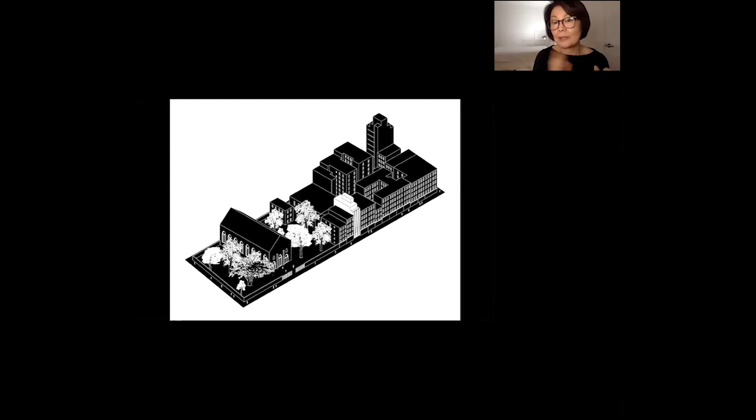This actually comes from observation in terms of your habit. In a way, I wanted to propose a facade that you can actually view up and down the street from side, so that this particular perception of how the building looks might actually generate interest. So it's not flat.

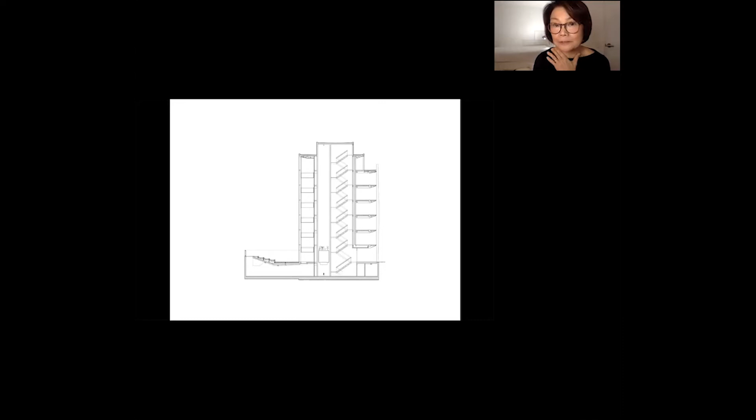So we came up with the idea of a twisted masonry facade, because this neighborhood had to be masonry, but the footprint of these buildings are very, very small, about 1,000 square foot footprint. And then it has a courtyard in the back. This is actually for retail, commercial purpose and offices. It's 7 stories, a ground up building like this.

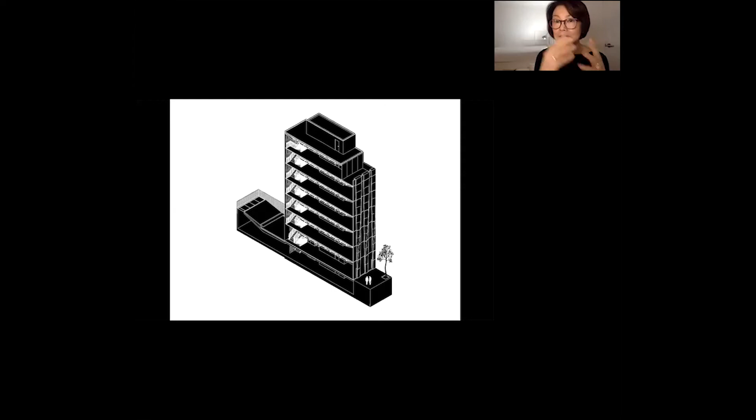In order for us to really do it, we had to do it nearly as of right, and we only had a space about 18 inches to have this twisting of the stonework out. We had to be very carefully calibrated as to how the perception of walking up and down the street as a casual way of life, and then how to actually craft this.

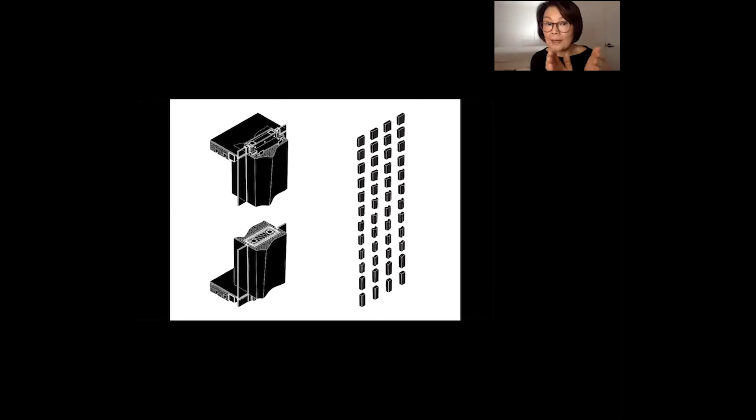In our office, we work very precisely in terms of materiality. We actually do every single part of a stone as it rotates up the building. The front and the back are sandwiched by the structural elements as a cupping. We have this catalog of different sizes and parts, and work very closely with a manufacturer in Italy.

It's actually very near Pisa, and we used fire-treated black granite in order to come up with this particular idea of a facade.

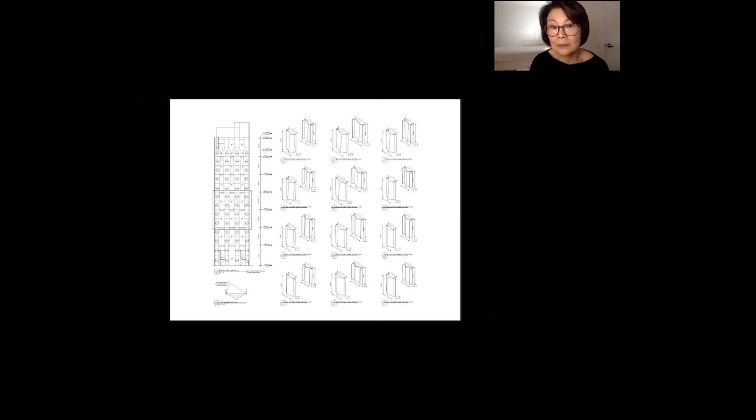These are some of the drawings which show different moments. But in order for us to achieve the effect we want, we had to basically draw everything up, and then everyone fabricated from it. In a sense, we had to make kind of shop drawings out of it.

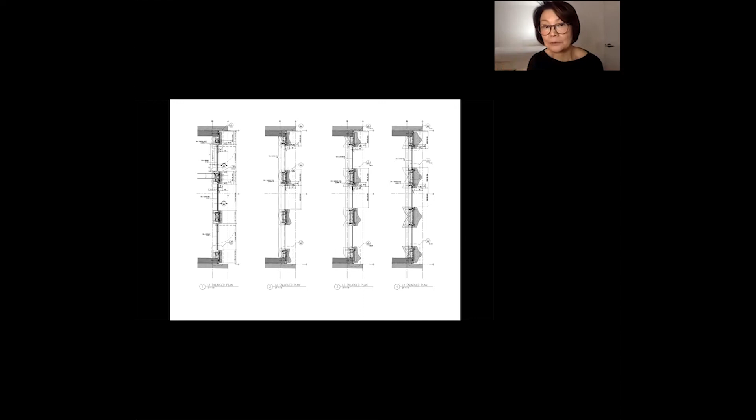This actually shows the development of some of the drawings from bottom up. And this shows a section through it, so that it comes from a more deeper section, but it rotates and becomes very flat as it travels to the top.

On the back of the building where it faces west, it actually needed some shading. So we used the same twisting idea, but with a 3/8 of an inch thick blade of steel, 5 inches, and it twists at an angle change rate of 3.75 degrees throughout. It actually creates a shading device, as well as a screen effect, similar but in terms of change of scale from the facade scale to a much more different scale at the back.

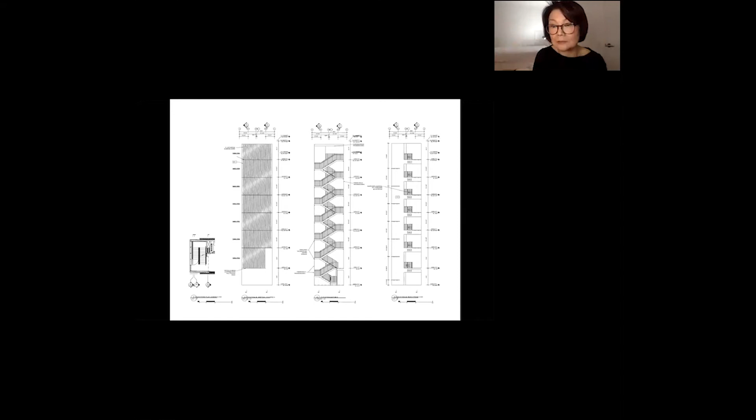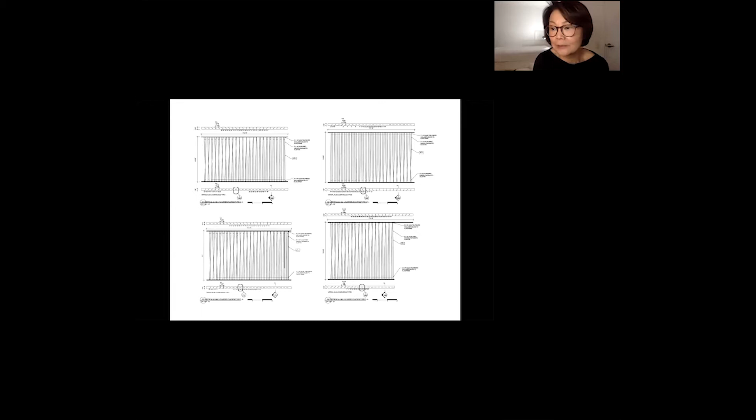These are some of the drawings that we collaborated closely with fabricators on. I'm showing this because our office is not very big, but we actually carefully work with craftspeople all the way through, making full-size mock-ups, and then drawings to test things out. We've gone to the site to work with masons.

In this fabrication process it's very interesting because they combined digital fabrication and mechanical fabrication. They also finished everything by hand and checked it. So 3 parts of craft were combined.

So in a strange sense, it looks like a bit of a strange building, but also has a recessive quality because of the black. It looks gray on sunny days, and when it rains it has a different coloration. So for the time being, it actually has a very harmonious relationship with the neighbors, precisely because of its mutable quality, that it's changing. So it's never been a very heavy neighbor.

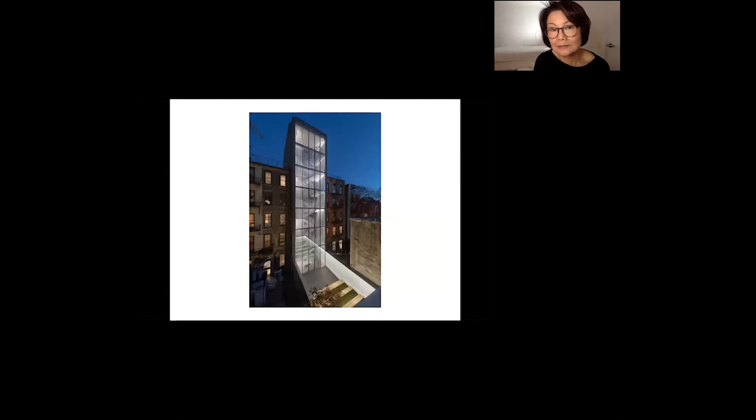But what they left is this amazing glass blocks we found in the basement that they meant to use, so we used it to line the walls of the courtyard. This is a tribute to Rick and Liz, it's like we used what we found, and we acknowledged this used to be a project, but we completed it. It looks like this at night, translucent glass blocks, and this is an actual photograph of what it looks like.

So in terms of this lecture, this is very contextual. This is a neighborhood, and it's a very static building, but it works in terms of function and program.

I would actually present the next project, which is very, very different. It really relates to what happens when we start to observe issues of a program. The project is called a Portable Concert Hall.

It started as a seminar at the GSD, and students in that seminar are still part of us. I formed a nonprofit with two other partners, one of them Hilda Ochoa Brillembourg, who founded Youth Orchestra of the Americas in the United States. She's from Venezuela, and some of you may know that in Venezuela they offer music education free to any child. Through that, they created El Sistema, which gave free education to all the talented kids. It produced amazing musicians, including Gustavo Dudamel at the Los Angeles Philharmonic, who is one of the people who came from that system, and he's also part of the Youth Orchestra of the Americas.

And then Jim Bildner, who is a senior fellow at the Kennedy School of Government, came up with the idea of a nonprofit with a very different model—not depending on donations only, but actually producing its own income. So this is a test case project for a different kind of nonprofit, as well as ideas for making a portable concert hall. It's been a very long research process.

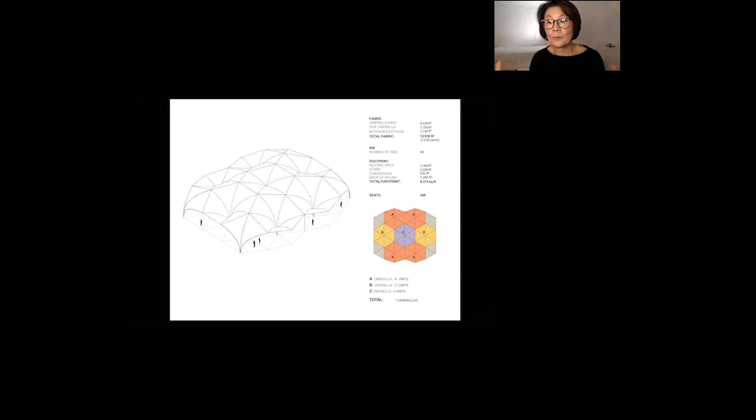So the particular shape of a Gothic structure, combined with the umbrella structure, was something we intuitively knew has acoustical properties. Combined with membrane, which has some capacity to contain sound, and a certain membrane which can reflect the sound back into the audience, we knew that's actually the way to do it so that one can hear the music well, without needing a microphone speaker sound enhancement system - in a sense, delivering live sound to the audience.

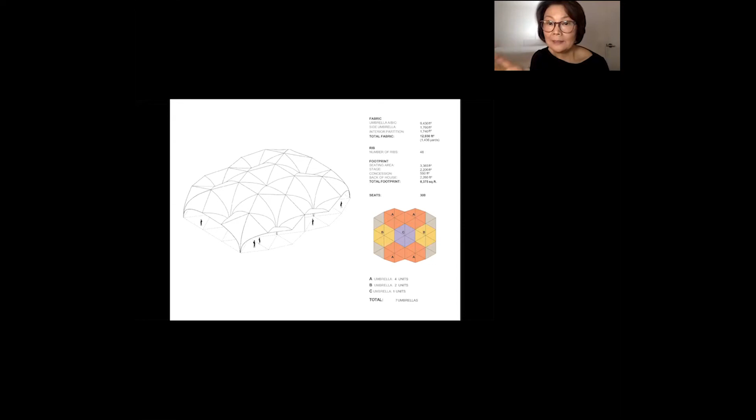For this one, it has a module about 35 feet in diameter. And we came up with different modules for a 300 audience, 600, up to 900. Also, the requirement is that it can be scaffolded, and each member can be carried by 2 people, so that it could be constructed manually.

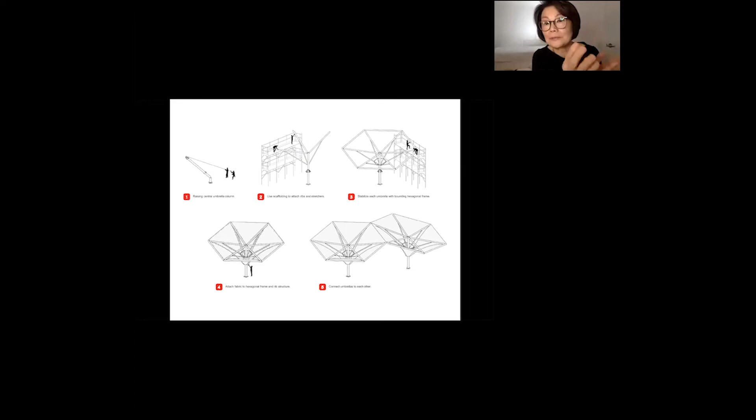But of course, I think in places - if we are actually proposing the center of Tokyo, labor is expensive. So other machinery will be more efficient.

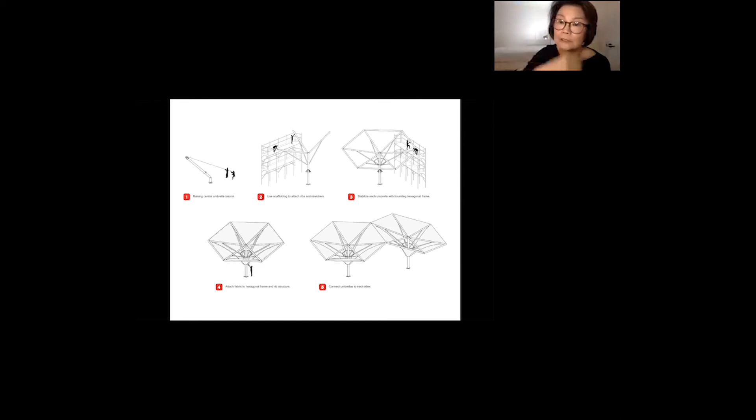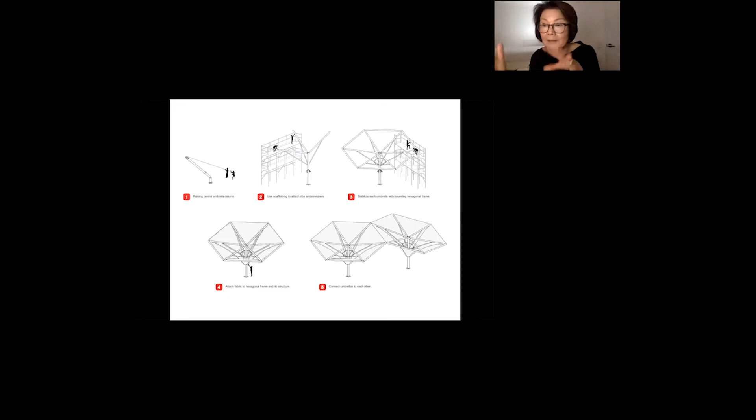But we essentially came up with this idea of a series of umbrellas which become dependent on each other structurally. A structural engineer from Switzerland came up with this concept of an interdependent structure, so that you don't build just one umbrella after another - one member takes over for the other. We liked this idea of building up a community, where everybody's interdependent with each other.

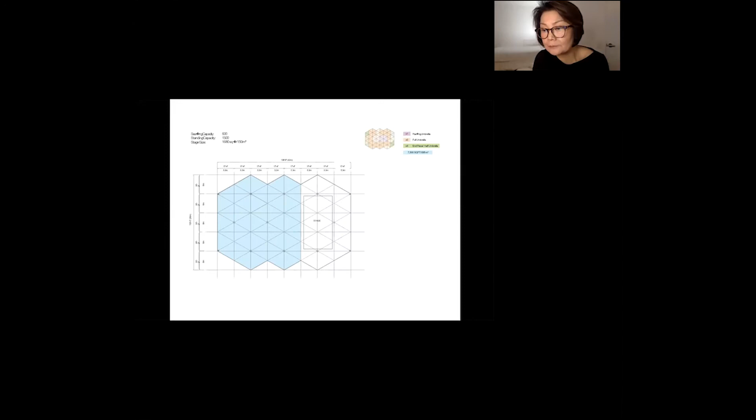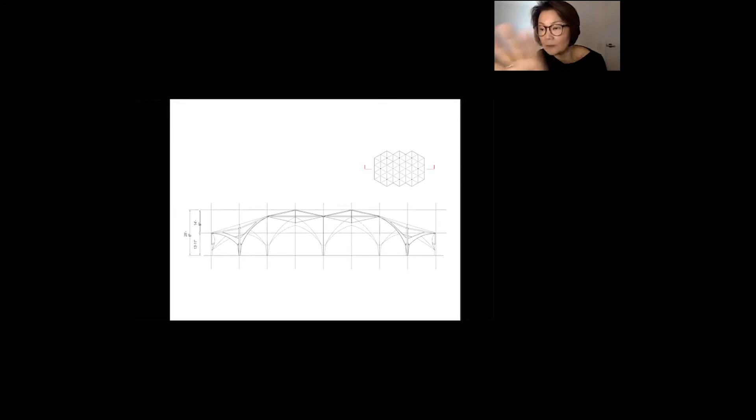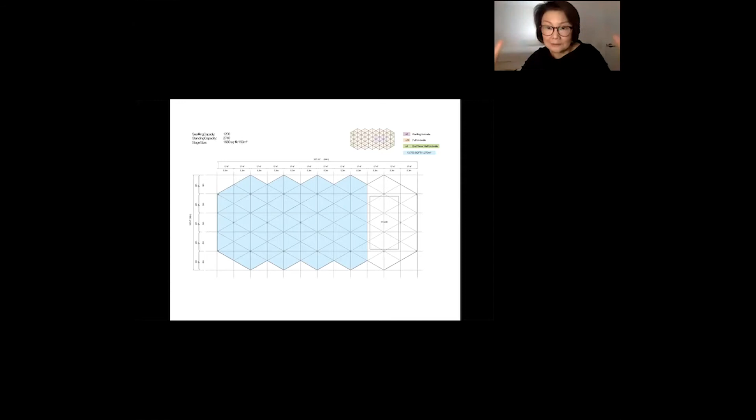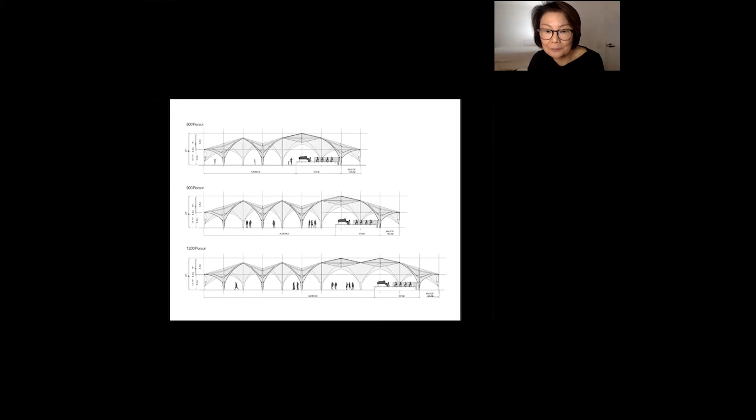And this particular shape came up with the idea that Beethoven's Ninth Symphony should be the biggest requirement - for the full orchestra plus full chorus behind - and we should secure minimally that amount of space around the stage, with the audience working around it. This shows a section of three different sizes, and as you can see, where the piano is placed is typically where there are no columns. So that's actually the layout.

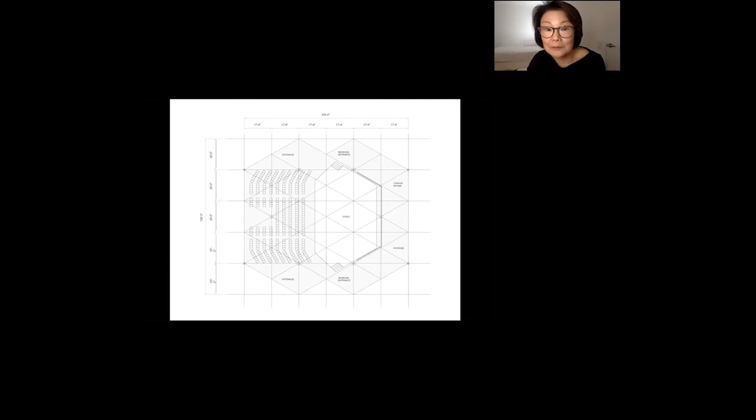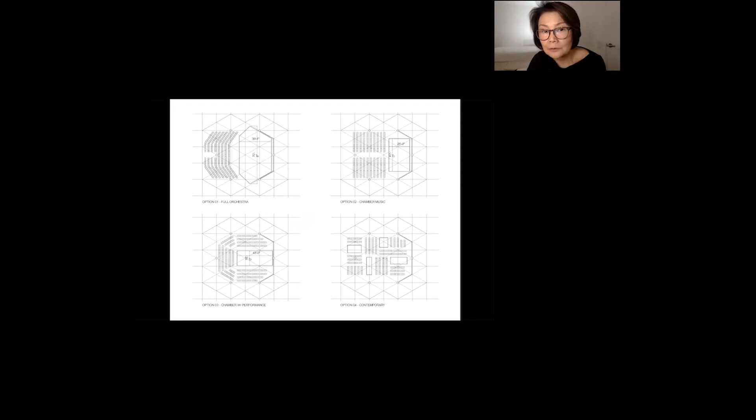This is pre-COVID, and we were able to assemble this for many people. This was a structure we were working on, with different layouts for chamber music or full orchestra. We also had the idea that this umbrella can collect water in the rain season in the communities, so if they choose to keep it, it becomes a rain collector. It's actually a very big idea for us.

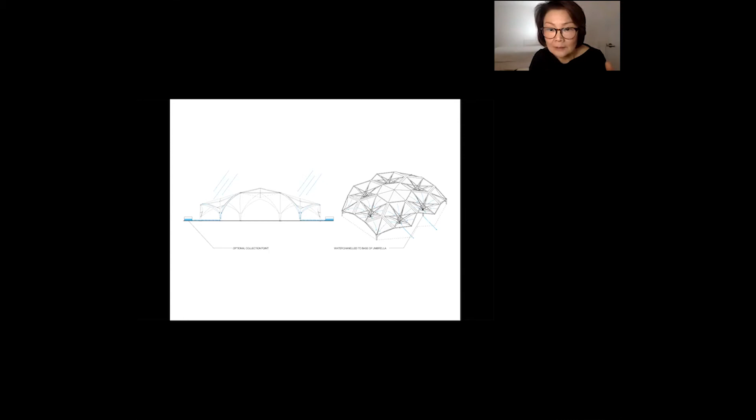As I mentioned before, what happens when there's rain is the tent membrane structure can act like a drum, so that you actually can hear the music.

With Arup Acoustics, we came up with a rain screen mesh, which was invented for the Beijing Olympics swimming pool. Some of you might have experienced when they didn't have this mesh, you couldn't hear anything inside that swimming stadium. Once they put the screen mesh on, it became very silent.

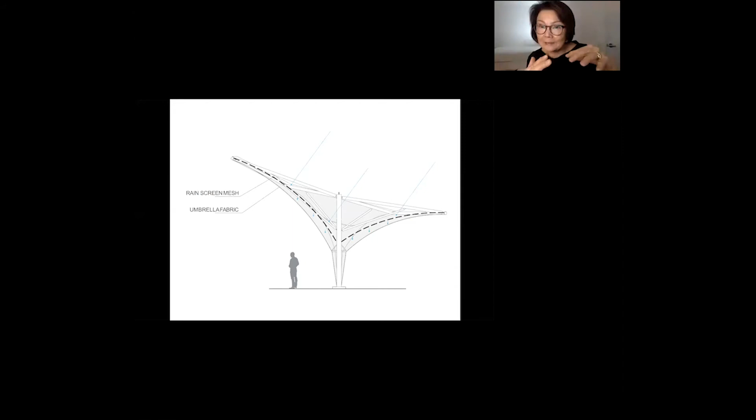It's a very strange idea, but we actually tried it. We came up with a certain amount of mesh - not too close, but open enough so raindrops can hit and bounce off. If it's too tight, it bounces and has the same drumming effect. If it's too open, the whole thing comes right into the umbrella fabric, causing the same problem. So we tested this out, and strangely, the screen mesh is slightly loose - it has this yielding effect, not completely tight, and has a bouncing effect to work with raindrops coming in.

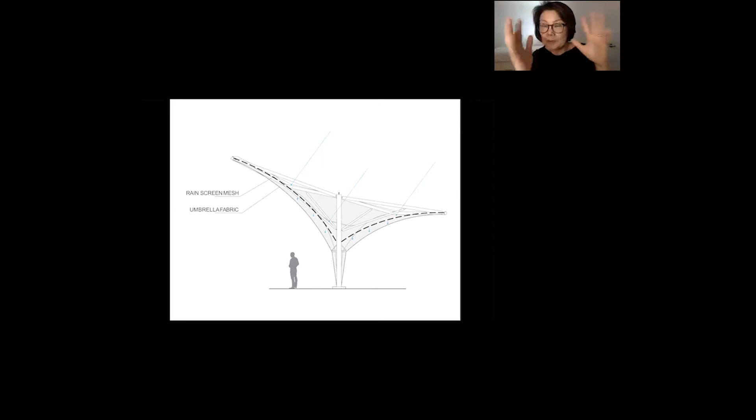And we had to do this testing of it too.

We also talked about having lightweight photovoltaic panels attached or embedded into the membrane structure - like patches of photovoltaic panels - because these will travel to places without electricity, so if this tent has capacity to produce its own electricity, it's actually much more advisable.

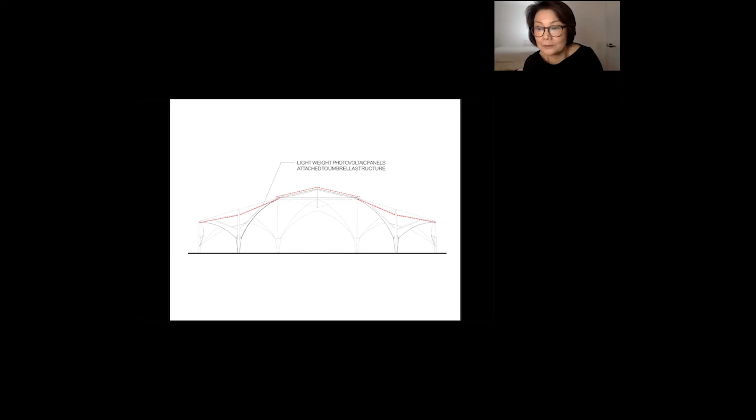We did this full-size mock-up in which we tested capacity for collection of rain, and also the acoustics of putting a mesh and then a hose. We borrowed a fire engine from close by and ran an enormous amount of water, and then also did acoustic testing, which turned out to be better than Tanglewood with microphone speakers. So it just tested very well.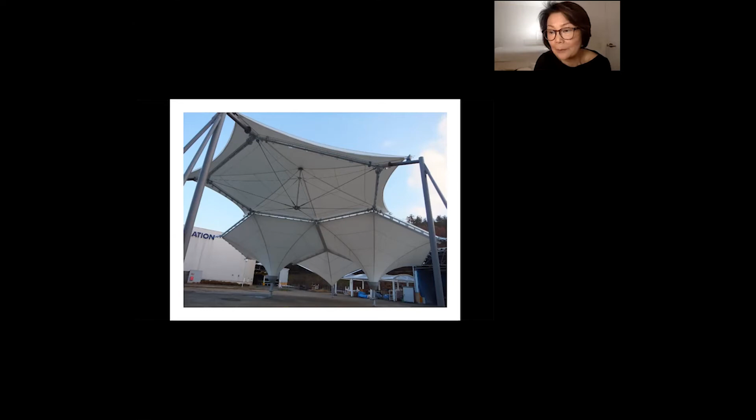This is the full-size mock-up we came up with. Currently this is doable, and for a structure like this, $1 million is probably not that expensive, but we actually wanted to improve on this.

We are currently working to use air beams, a technology developed for Expo 70 that no one really touched since. We're working with Taiyo Kogyo to develop a new model completely made by membrane and air, avoiding metal altogether for economy, ease of transport, assembly and disassembly, and also a more ecological idea of being able to use and reuse.

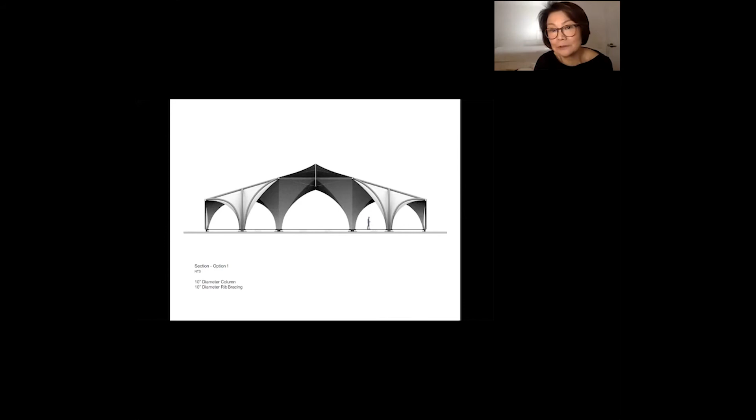So these are some of the models that we are working on.

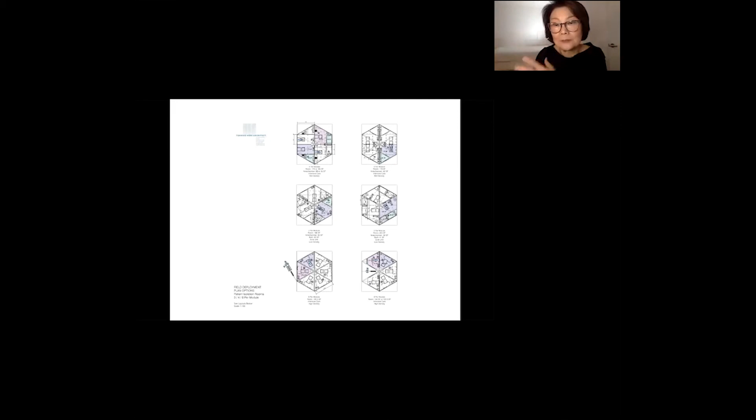Also during COVID, we were asked to look at the possibility of a module to be used for field deployment of hospitals or patient spaces. In Japan, as you can imagine, houses are very small, and if one person gets COVID, they're not ready to go to the hospital, but the hospital has capacity problems too. So there's an interim space where they may be housed for some time to recover and get better, but isolated - not completely isolation. There was a need for this kind of space, so we were asked to develop this, especially using air beams.

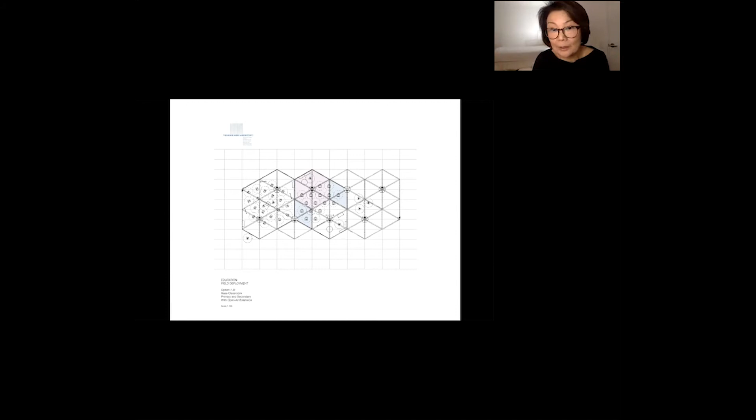We've done these proposals for it. We were also asked to do layouts for education, socially distanced, that would be perfect for kids - outdoors, but covered. So these are 3-season classrooms. In Japan it doesn't get that cold, so it's possible for kids to be there. We had to do layouts of different types for field deployment and social distancing.

But with the social distancing, with this concert, we could house 100 people instead of 300. And performers were saying that maybe this is actually what we need. We could do 3 performances, but at the moment they are all craving interaction with the audience.

For them, doing a performance over Zoom is like doing a rehearsal in front of an empty stage. So I think there will be some development within probably this year—a realistic idea of making this into reality.

It took us a long time to do research, identify everything, and technological development. But again, this came from a really simple observation: why is music not accessible to a wider audience, why is the concert hall not doing well economically, and is there any other alternative typology? So this came from a very simple observation and conversation with musicians going forward.

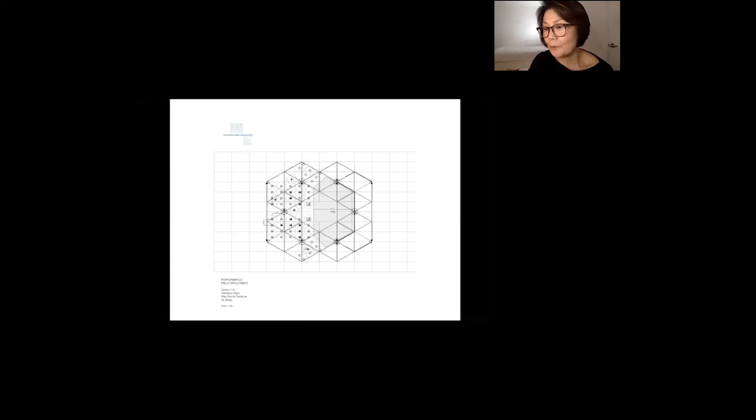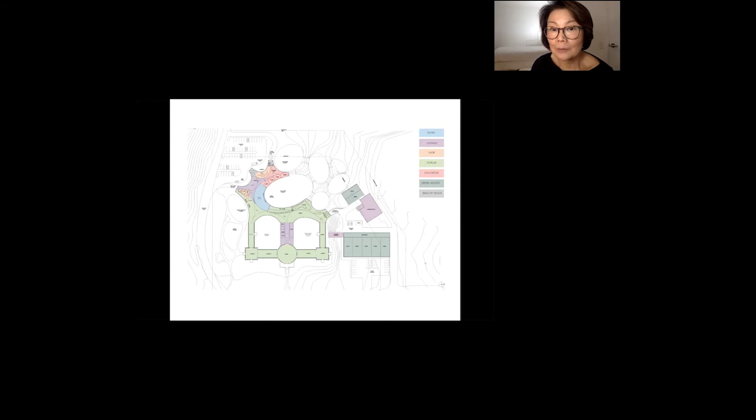We came up with a plan which opens up the back of the Botanical Gardens to Olmsted Park, and also improves circulation and introduces new uses, more educational ones.

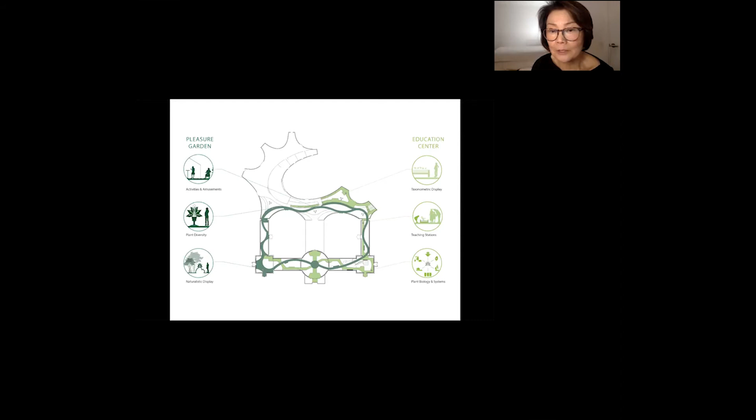This is the idea we came up with for a new botanical garden, using ETFE as a membrane instead of glass. It's actually more ecological—you can inflate it with very little electricity, and deflate it as needed. One can have different shading gradients for appropriate plant growth, and it's much lighter than glass and easy to maintain.

So there's a lot of advantage to using this new material, and going into the future, having this different geometry may benefit from a more comprehensive way of programming and working together. This organic shape also works better with the shapes of the park.

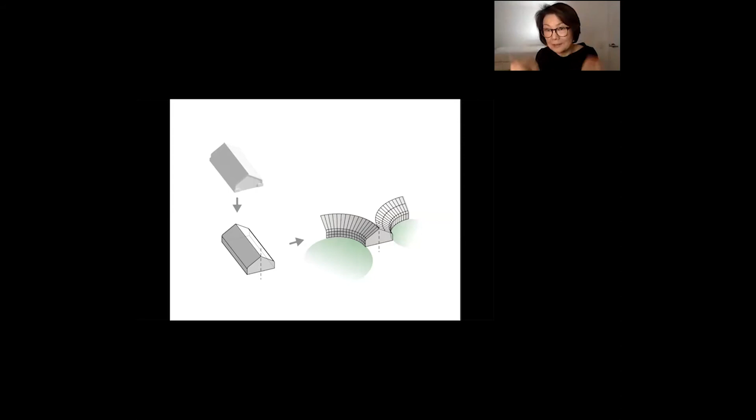There's a simple idea of unzipping a typical greenhouse and then parametrically developing it. So each section of what we propose is actually a section like a typical greenhouse, but it develops into a different shape and size.

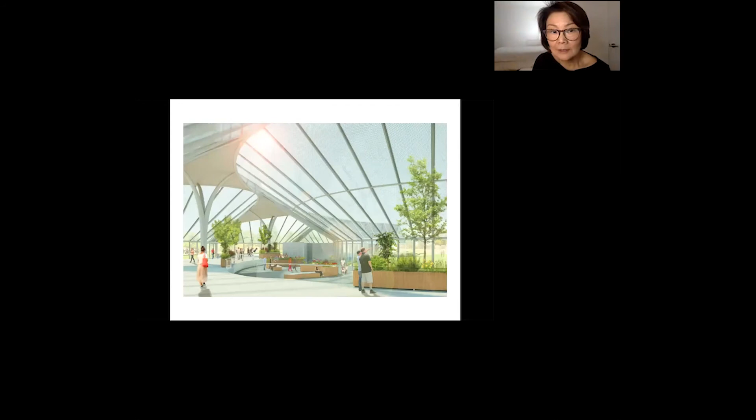We finished schematic design, and we're just about to launch into design development.

It's a long-time project, but in a way, the idea of how to enhance the quality of existing historic structures—observing them as historical artifacts, but then making a possibility for future development—turns them into not just a leftover artifact, but a launchpad for future vision. This is important, especially the role of botanical gardens as studies of ecology, which matters for kids and adults alike.

So the botanical gardens used to be a display of colonialist riches of plants, but now they're transforming into much more of an ecological center of education. So the role is changing rapidly as we speak.

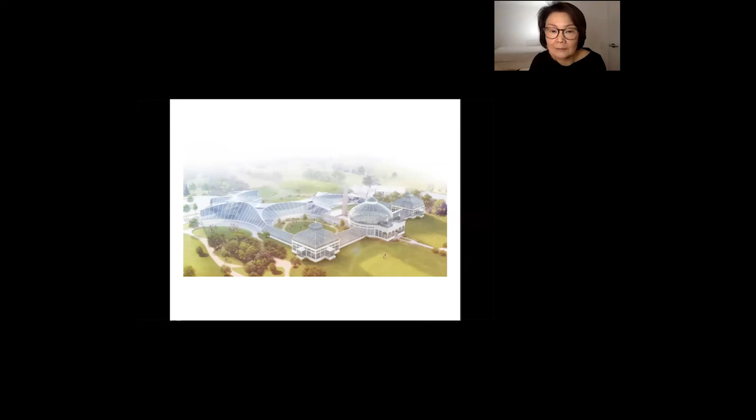Related to that, you can see I've been using these curvilinear ideas throughout, working with engineers in ETFE. I'll show this subway canopy—probably the smallest structure in Hudson Yards, but it's had a huge amount of development. This is a subway line that comes in, and it has an enormous amount of people coming through.

This is only a public transport area, but people leave and arrive. We collaborated with Schlaich Bergermann's office, structural engineers based in Stuttgart, though they also have an office in New York. In this, we worked with a hybrid structure.

It actually looks like a turtle shell—it's a hybrid dome and then a hybrid tunnel. We came up with this shape because, if some of you have been to Hudson Yards, it's incredibly windy, with wind coming straight up from the Hudson. So we shaped it so that the wind goes above it.

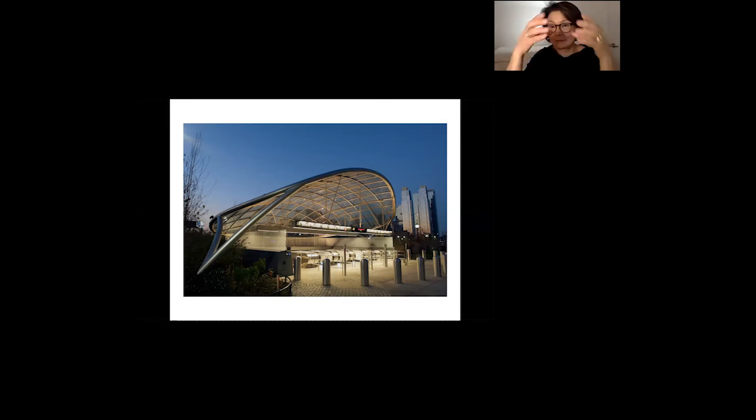But it's also multi-directional, so one can identify it and enter from different parts of the city. We had to deal with the MTA because their structure is very rectilinear—we had to explain that it would become a wind tunnel if they built it that way.

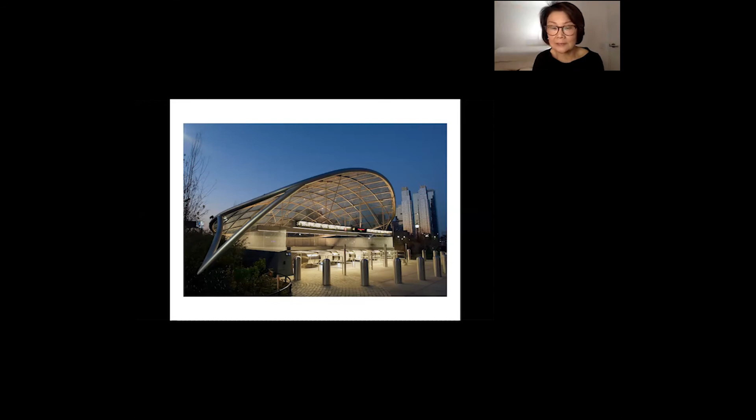You just have to come up with a shape that works with the condition of a site. The idea of wind is something we observed just being on the site, trying to stand up straight and constantly getting blown. As an architect, we have to do something about this, so that was an interesting generator for it.

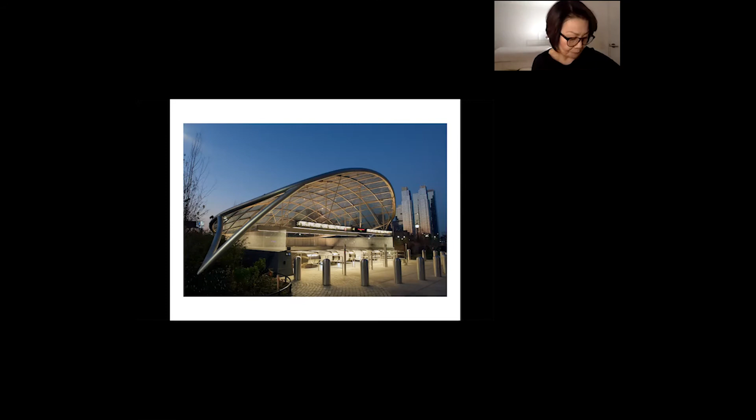With this particular technique of building, this is a grid shell, which was particularly developed by Schlaich Bergermann's office. We've had different discussions, and it's important to show because the last two projects I'm showing today are a collaboration with this engineer for two projects in Africa.

So we are going now to Africa, to a very remote region. Dakar, as you see, is the capital of Senegal. This is sub-Saharan Africa, which is mostly grass and very dry. It has a rain season, usually starting May into mid-September, and then a dry season. So it actually goes around in cycles.

The site is the red circle near Tambacounda. It's about 7 hours drive from Dakar, a very remote area. We were asked to develop a cultural center by the Josef and Anni Albers Foundation.

Going back to the origin of this project, I actually did an exhibition design of Anni and Josef Albers at Cooper Hewitt, and that's how I got to know the Josef and Anni Albers Foundation and realized they are doing work in Senegal. I was very curious about it, and they asked me if I would do a studio with Harvard GSD students to see the possibility of a future. I said, oh, that's very interesting, but I've never been to Africa.

But it's a very poor area. How would it be productive to take students there when the money the students use to travel could instead be given to the community directly?

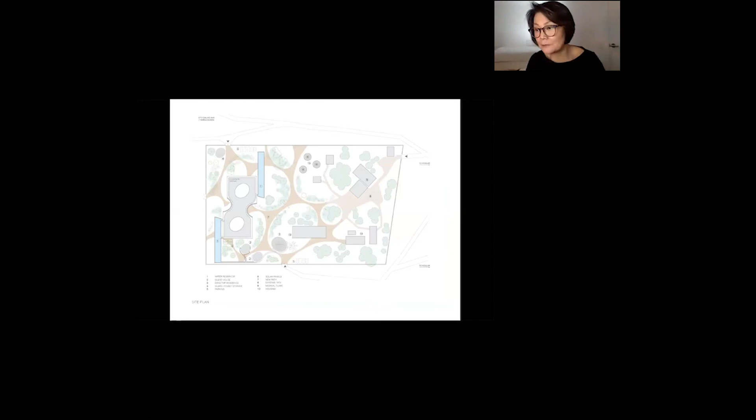This idea is multi-use. It has workshops, an exhibition space, artist residences, and a marketplace, originally made for two artist residents plus the director's office. They've continued—now in the fifth year—to have international and local artists, African and European artists, filmmakers, and many others come in and interact with the communities.

Also important about this area is that it has about 12 different tribes speaking different languages, and they exist peacefully together. One big gathering is when they perform together, bringing their own instruments, exchanging music and performance.

The doctors themselves make skits for the community, because you can't send out pamphlets—many can't read, and they don't share one common language except French, which is the colonial language, not a local one. So through performance, they create skits at the cultural center and take them to different villages so people can watch something funny while learning, for example, how to put up mosquito nets.

Now they're probably making skits encouraging vaccines for COVID, and earlier for Ebola, they made skits to help people refrain from the habit of washing dead bodies, which is very important since that's how Ebola can spread. Imams participated in these efforts, and different rituals had to be adjusted for different purposes.

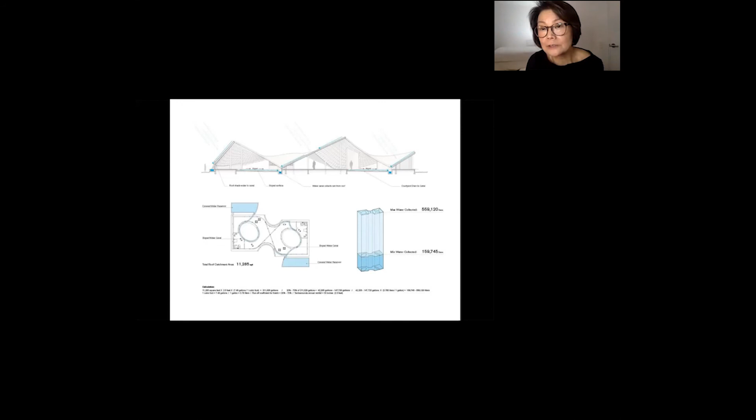We determined that this particular roof should be able to collect about 30% of the villagers' water use by optimizing the slope, and it has two cisterns to help collect it. We worked with Schlaich Bergermann to come up with this optimum roof shape.

It was also built with mud bricks made locally from their own mud. Luckily, they have a high alkaline, reddish earth. They build it during the dry season and dry it by sun—it's structurally sound, but also has openings for ventilation, with local bamboo in a grass thatch structure. One reason for this is that we wanted to use local material, but also local labor.

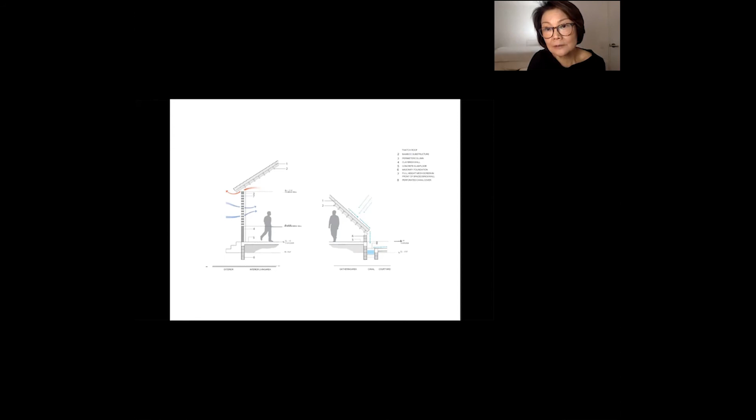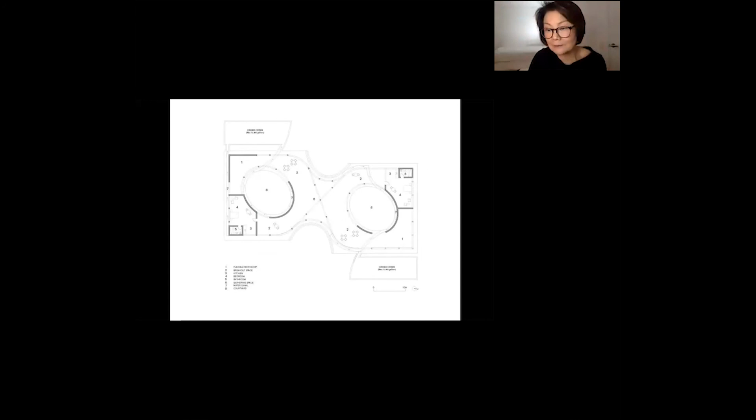These villages cannot import materials—it's too far and too expensive. The idea is also to give jobs to the villagers, to provide income, but also for them to be part of this project so they can keep maintaining it. For example, the thatch roof can be blown off by wind, but villagers can cut the grass and come repair it, and they get paid for this. This is actually a very interesting idea.

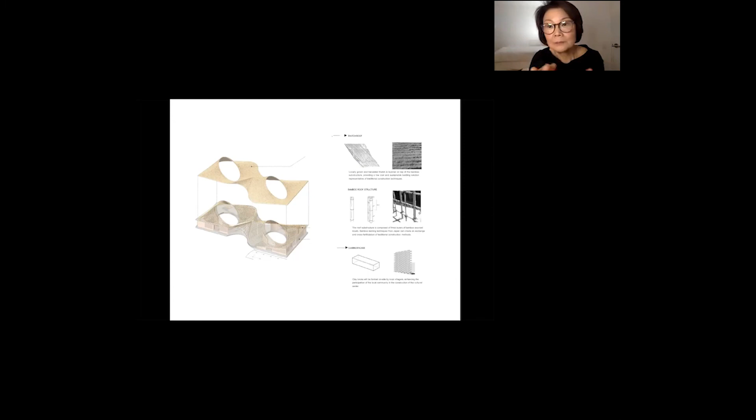So what we did is we digitized the entire thing, did incredible analysis, and put it back together in terms of how it could be hand-built. These are the techniques that relate together. The idea is to have a compression ring in a skewed condition, and then the ring is sitting on top of it, and it radiates out.

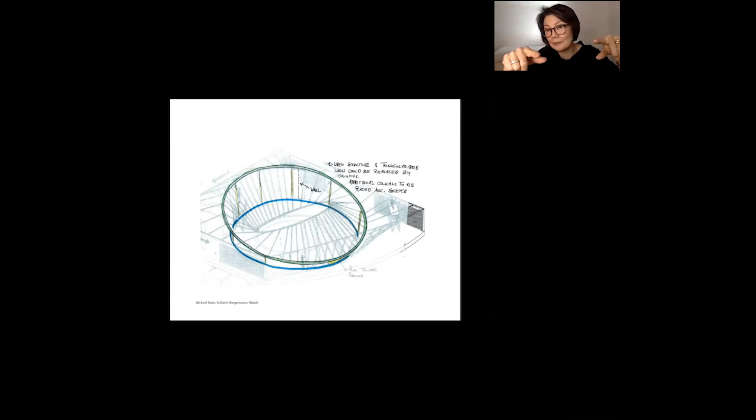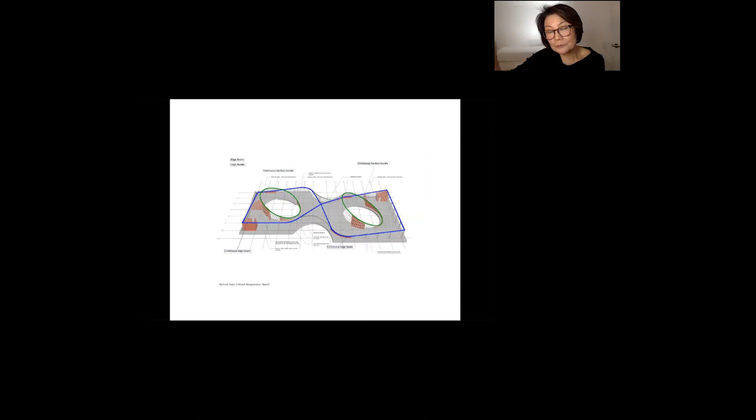So in a way, we had to design it so it could be built in a sequence, because they don't follow blueprints. It was a very good lesson for us to design something that can be built in sequence. They built the perimeter beam and the central compression ring, and then started to project the bamboo structure along it to work it through.

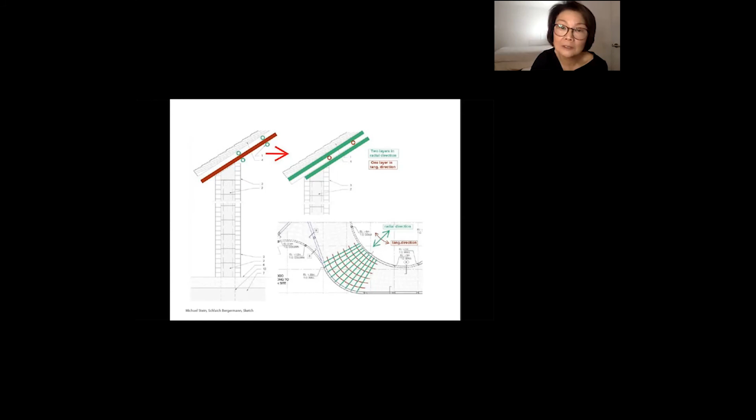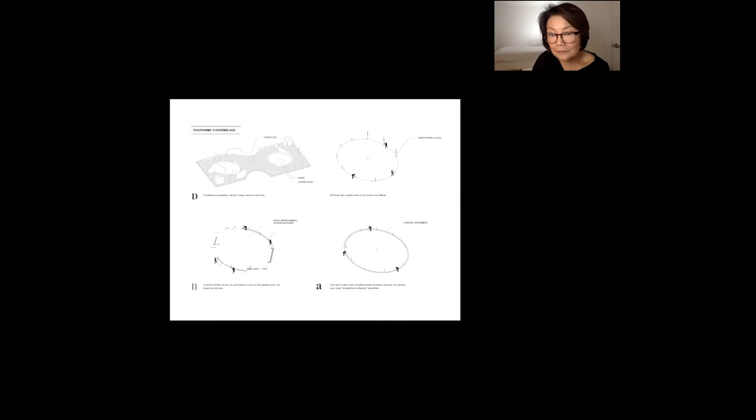Some of the area where it's more stressed has a double structure in green, as you can see, but it's not so foreign—it's actually an existing technique. This is a kind of diagram we provided to show how it's first laid out and then goes together, and that's how one can actually put things together.

With them, they actually made the roof a little thicker than a traditional thatch roof, which gave it more insulation capacity. What's interesting about this thatch roof is that the grass gives direction, so it directs the rain into the canal system right below, very efficiently.

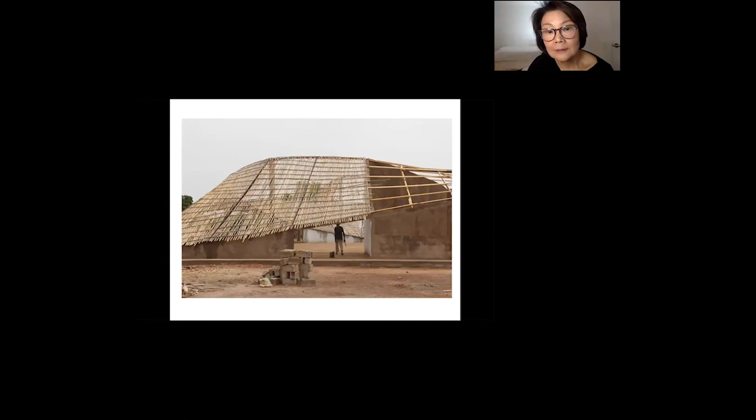I think this is something we learned about thatch roofs from before. As in the last project I showed in a school, thatch is a series of grass densely packed together, but it's still porous, so that when hot air comes in, it can gradually go out. It naturally creates a stack effect if we orient the building properly.

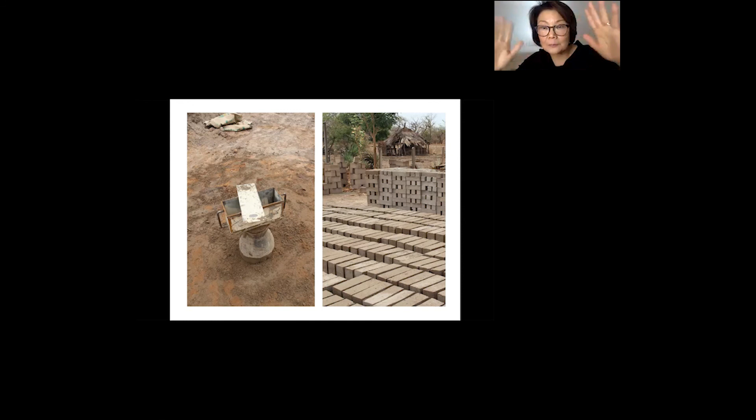That's actually what we did: the two circles are oriented to the direction of the wind so that there's a breeze inside constantly, which is a big deal for a place where it can be 115 degrees constantly in still air. So this building also manages to address issues of comfort.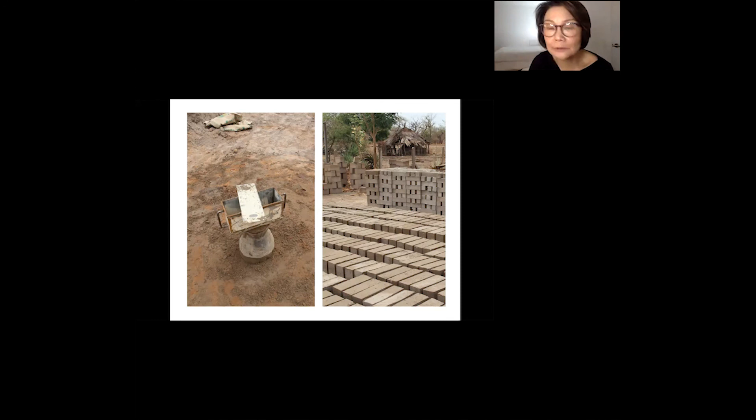This is how they make the mud blocks. These are examples of when Josef Albers worked with brick buildings—especially if you go to New Haven, Connecticut, there are a lot of buildings on the Yale campus, and also at Harvard Law School.

This is an example of Albers combined with more of a local tradition, like this one, which prevents sandstorms from coming in while still allowing ventilation. So it serves a double purpose.

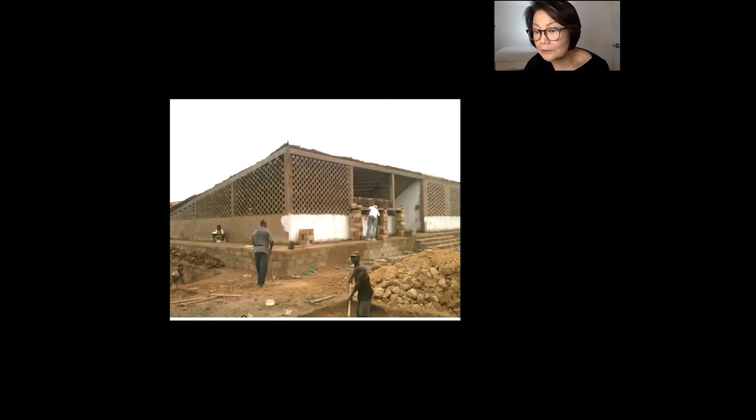It's under construction, and we had a white plaster put on it to deflect the heat. What you see in the grass is what's used, and they constantly grow it so they can repair it when something happens. This is what it looks like from inside.

They were also inspired by Josef Albers' early work called glass painting. Albers was very poor as a Bauhaus student, and in fact got these glass pieces from the garbage can at Bauhaus and put them together. Inspired by this, there were broken tiles.

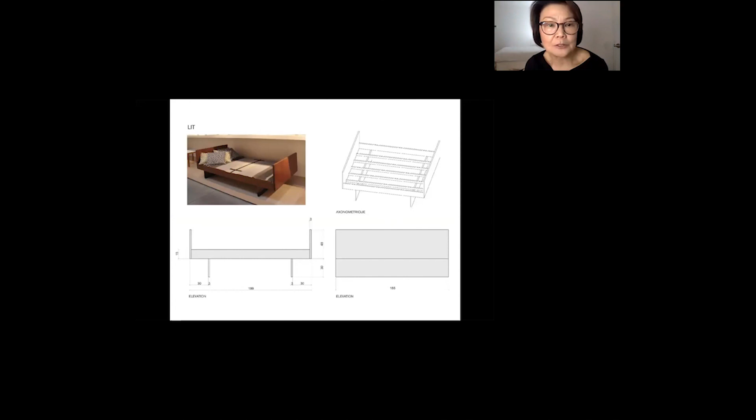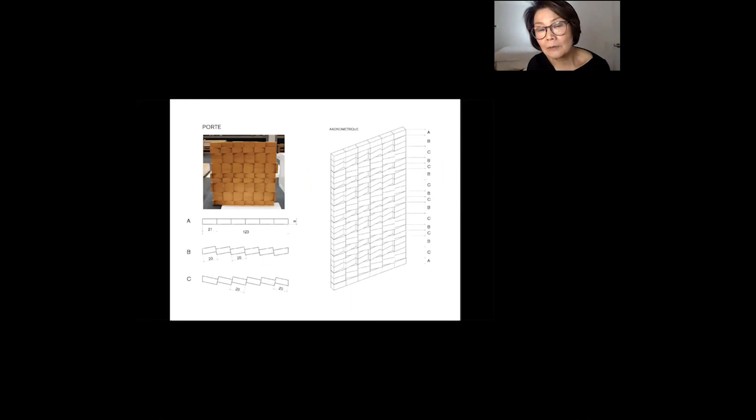Also looking at Josef Albers' furniture designs, like this one designed for Harvard dormitories, they built their own furniture inspired by Albers' ideas, same as the stools. These are also mock-ups of brick work by Albers, appropriated for doors, which they did on their own. It's DIY, but I think these are incredibly beautiful, especially with that white floor system.

So the center has many different uses. Kids come there and hang out at night, and we have generators at night, so that's where they come to do homework. The ladies come in too, and it has many different types of spaces, which allows diverse communities to occupy it all at once. I think that was actually the idea behind it.

This was the opening. About 2,000 people came, and it's maintained well by the rotating villages.

Now, 4 or 5 years later, planting has become a big program for them, and it has become an income source for women here. They grow high yield plants and vegetables to sell, because they sell at high prices, like okra and eggplants, and they've also started producing honey and fonio, another kind of very fine grain, which they're selling as a product right now. So that's the aspect of it going forward.

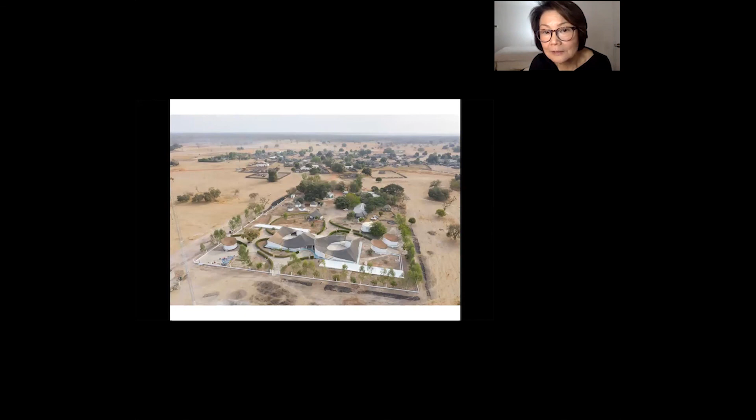These are some scenes of the community, which continues to be very vibrant and continues to become more and more green. This is a view of it at night.

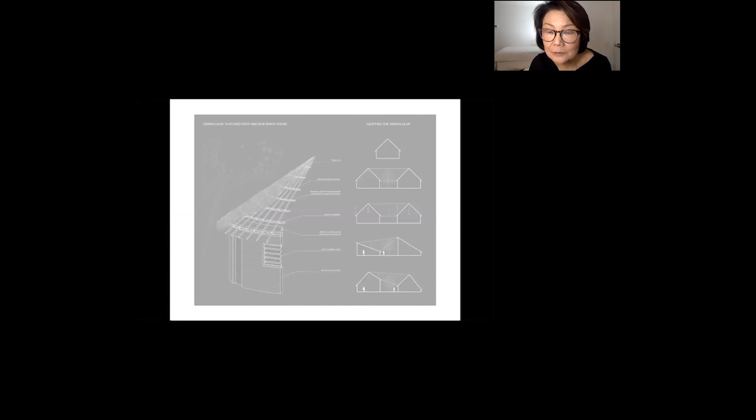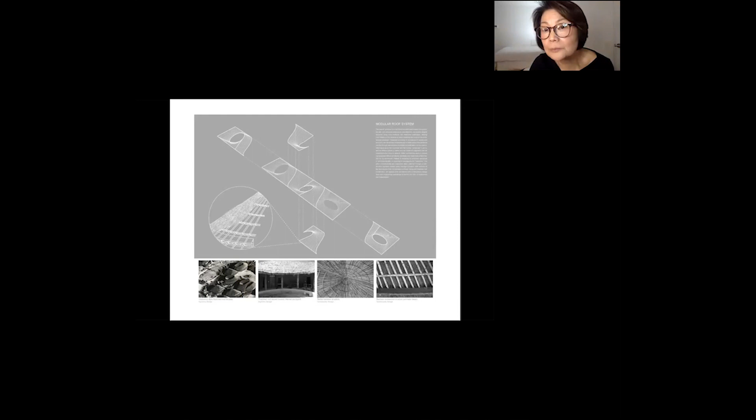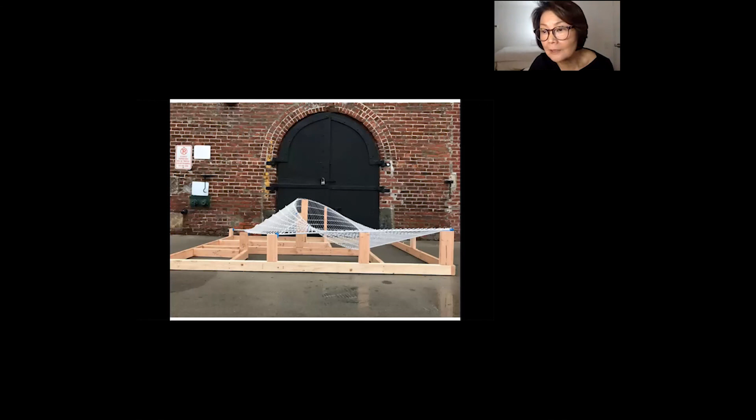With this, we've been doing a lot of research on that structure because we're very interested in the possibility of geometry. For the Chicago Architecture Biennial, we were invited to show the research part of it, a modular idea of a different type of geometry. With this particular technology, one can create these half-size models.

The last project I'll show is Fass School, also by the Albers Foundation. This is an elementary school for ages 6 to 10, located much further on the other side of the Gambia River, in one of the driest areas in Senegal, in sub-Saharan Africa, and probably one of the most conservative Muslim areas.

This is the first elementary school there to teach any secular education; there have only been religious schools, so in a way the kids were not able to read, write, or add numbers. It took about 3-4 years of negotiation with Nicholas Fox-Weber, head of the Albers Foundation, with the imams. But it was actually the imams who wanted the Albers Foundation to build a school, because they saw the possibility of a gathering thread. The curriculum had to be inclusive of secular education, which will be the future for the kids—they can't just be ignorant throughout their lives. The religious education is very important, but so are practical matters.

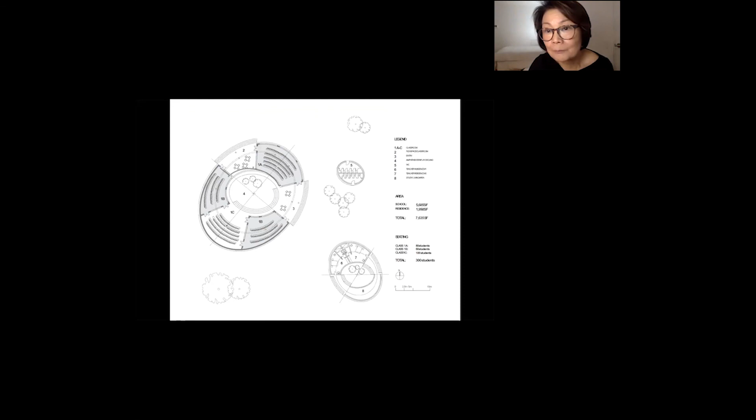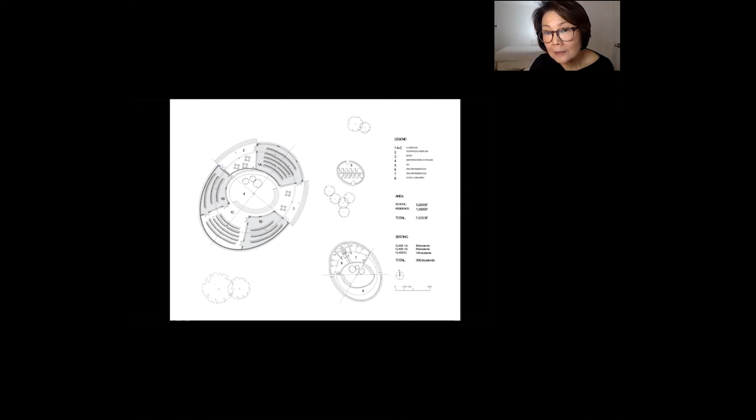This quickly became a reality in terms of a school with 4 classrooms, a teacher's residence, and bathrooms. The idea is similar to Thread, but it's a circular school. We call this, in French, l'école maison - the schoolhouse - similar to the one-room schoolhouse in America which Josef Albers taught in. The idea is that kids come from different communities, but it's a house, not like the regular schools they attend.

Normal schools are made out of corrugated metal roofing, which makes huge noise during the rain season, and kids get cooked in the hot weather, with concrete blocks making it look like a prison - none of the kids want to go there. They end up having to study outside the schoolhouse because it's too hot and stifling inside. So the environment was a problem too.

What we learned in Thread applied here too - it's the same group of people, and luckily there's another outpost of a clinic run by Dr. Magueye Ba right next to the school. The school also wanted to combine and include public health education for kids, which is very important.

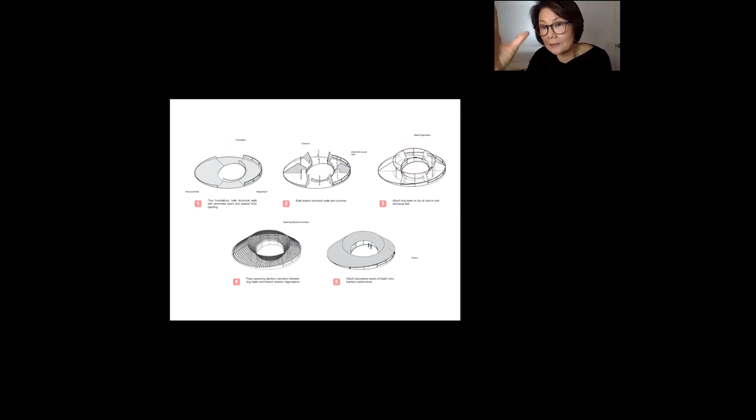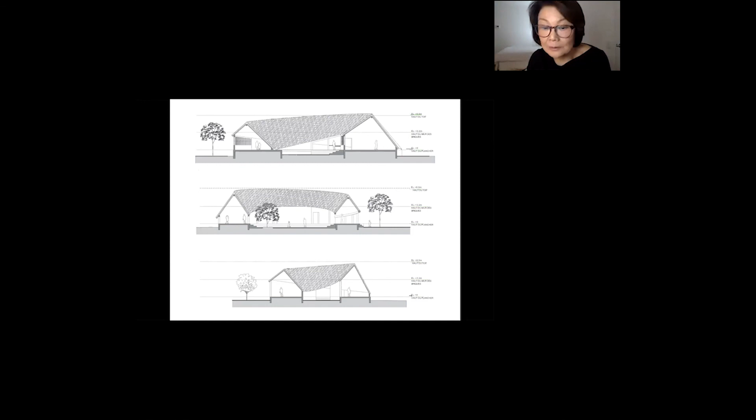There are bearing walls for different sections, and the circular elements are slightly skewed but oriented toward the west wind direction, so a breeze flows throughout. The peak of the roof helps create a stack effect, keeping the classroom cooler than the outside temperature - about 10 to 15 degrees cooler - which attracts kids to be there. That's a big deal, because if kids want to be in a cool, comfortable classroom, that's a huge improvement.